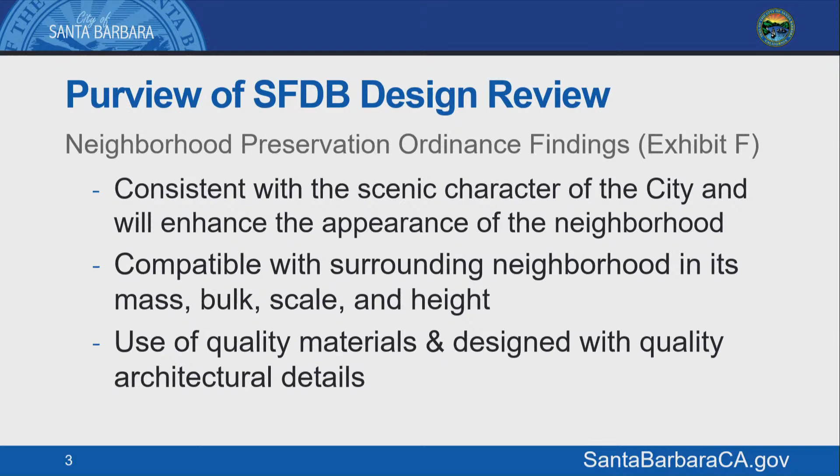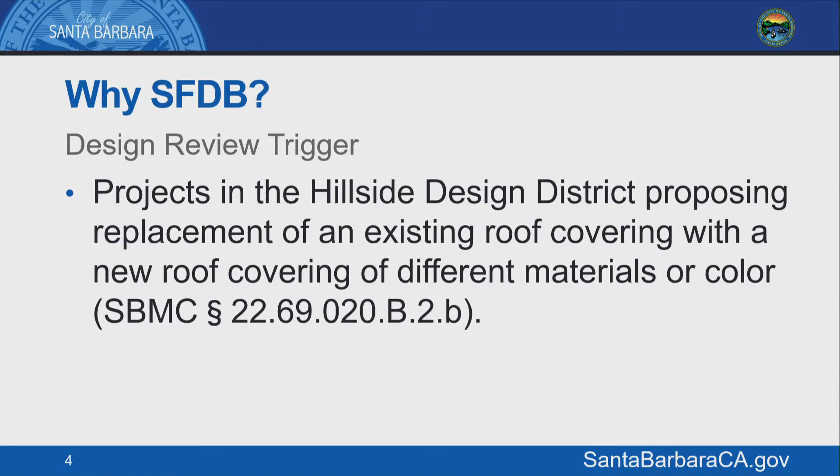The reason this project has to be reviewed by the board is because it's located in the Hillside Design District, and it's proposing replacement of an existing roof covering with a new roof covering of different materials or color. For example, if a wood roof wanted a metal roof in the design district, it would need board review. Overlook Lane is replacing its current shingle roof with something different, proposing to replace the existing burnt sienna red composition shingle roof with new terracotta colored Spanish Brava lightweight tile.

The Brava tile will surround solar panels already approved in building permit BLD 2023-00193, and new composition shingles matching the existing shingles will be installed underneath those solar panels.

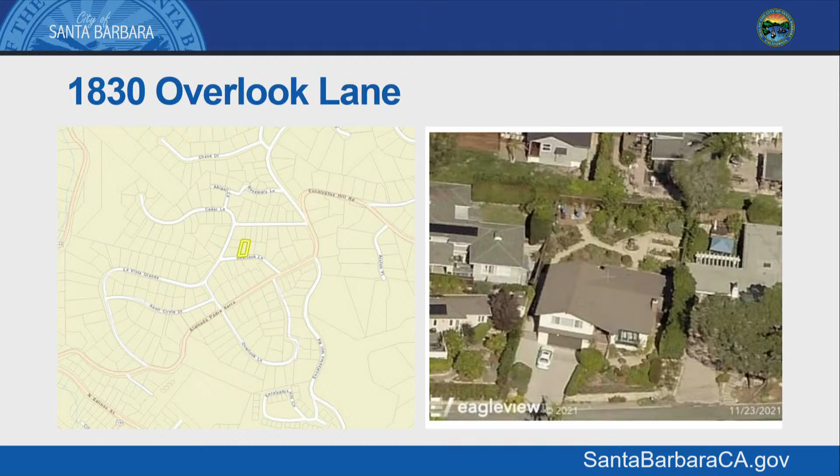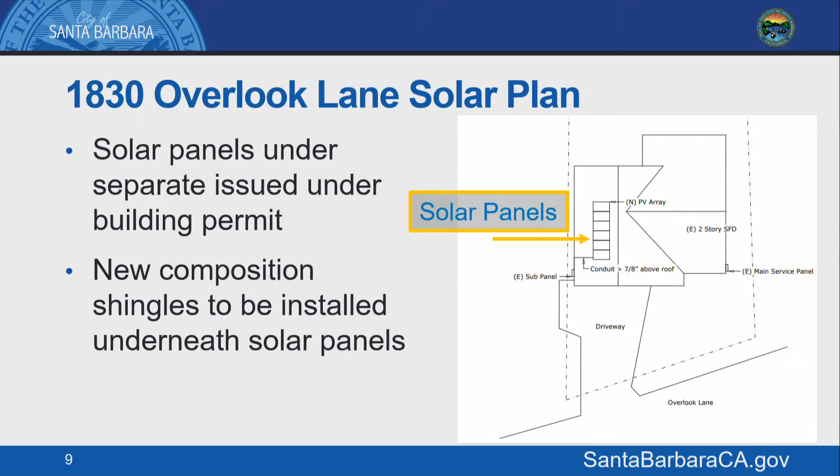You can see the solar panel project already approved under a building permit. Solar panels are not under the purview of the commission nor the design board, but it's helpful to understand that the proposed roof tiles would be built up to the panels and not underneath them — again, those are the Brava tiles.

The re-roof project was reviewed twice by the board. At the initial hearing, the re-roof was denied with the caveat that a like-for-like roof replacement, or a clay or concrete tile roof, would be supported by the board. Facing denial, the applicant requested the project be heard by the full board for further consideration, which the board granted. At the next hearing, the project was ultimately denied in a 3-2 vote.

The SFDB denied the project because they could not make the neighborhood preservation ordinance findings, nor the single-family residence design guidelines for the proposed Brava tile. The tile wasn't natural enough, it couldn't hold cement mortar, and so it couldn't have those double starter eaves, randomly laid field tiles, or mortared bird stops.

Now, I'm aware that is quite a lot of roofing terminology that not everyone in this room might be familiar with, but I'll get to it soon. You can also see Exhibit G in the staff report for a quick reference, if you want to refer to that now.

Now, 2 of the 5 board members found the tiles acceptable. For them, the tile could have enough Spanish roofing details to meet the ordinance and the guidelines, especially because the roof would require a costly structural upgrade to support anything heavier than what's there today, including heavier clay or concrete-based tiles.

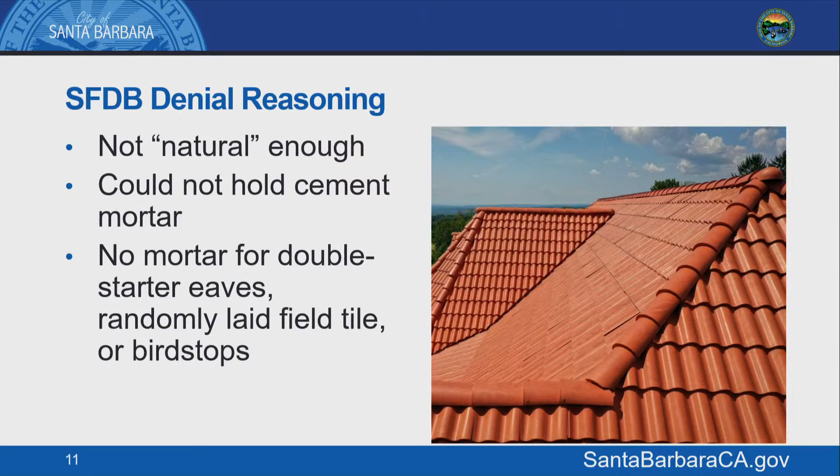But whether in support of or against the Brava tile, the board decides if projects are okay to construct using the Neighborhood Preservation Ordinance and the Single-Family Residence Design Guidelines. The Neighborhood Preservation Ordinance includes 9 findings that the SFDB must make for a project in order to receive approval. But the one we're focusing on today is just quality, architecture, and materials, since that's what the board could not find for the Brava tile.

The tile's plastic-based material just couldn't show its age very well, and it didn't look very natural in appearance. For the ordinance, the material has to look natural enough to fit the appearance of the ridgeline or hillside, and that's exactly what Brava tile could not demonstrate to the board. The tile was just too plastic and could not age like natural materials could.

So while the board has to make findings required by the ordinance, the single-family residence design guidelines help the board decide if a project can meet the ordinance findings in terms of its design.

The single-family residence design guidelines cover everything from house colors to new second floors, and they have a section dedicated to just tile roof design. You can see some of those guidelines here that the board used to help them deny the project.

These criteria apply to both clay and concrete tiled roofs, and really any tile roof for a Spanish home in the Hillside Design District. Now, obviously, they're really specific and narrow criteria, and that's because of how much our city cares about keeping its Spanish look and feel.

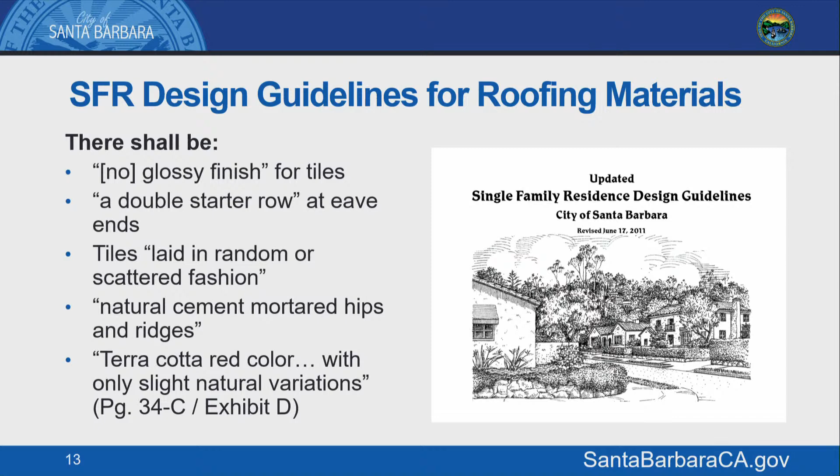So you can see here how different a traditional clay tile is compared to the Brava plastic-based tile, and why the board denied the project. The photo on the left shows a roof downtown that adheres to the criteria in the design guidelines with classic clay C tile. And the photo on the right shows Brava tile from their brochure.

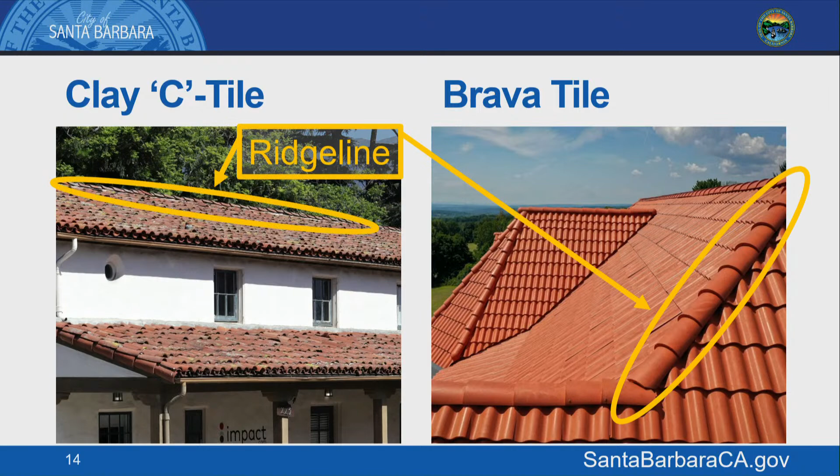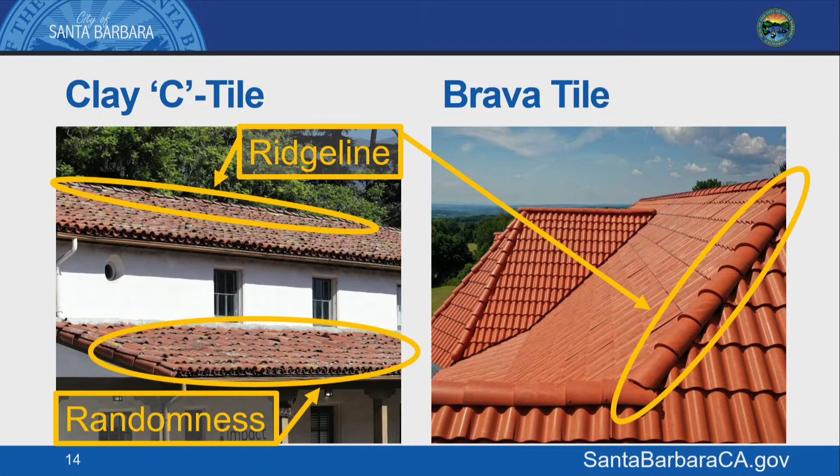And you can kind of see the ridge line there compared to Brava tile. The photo on the left uses mortar, whereas the one on the right does not. You can also see kind of more randomness. The Brava tile on the right is very flat compared to the photo on the left.

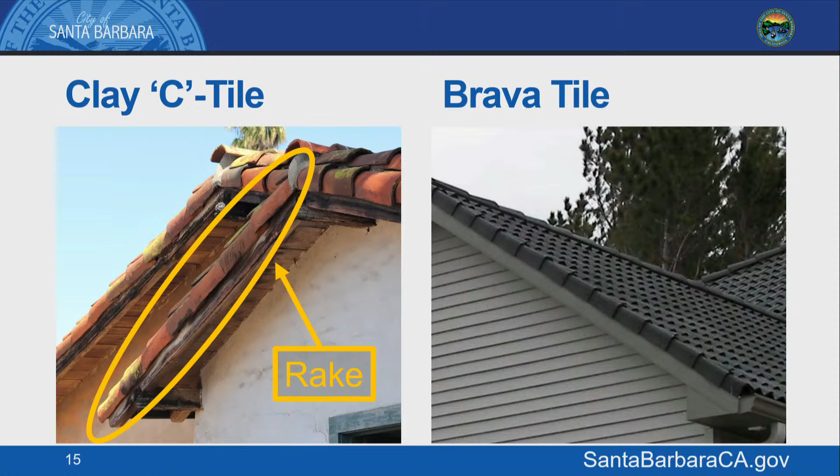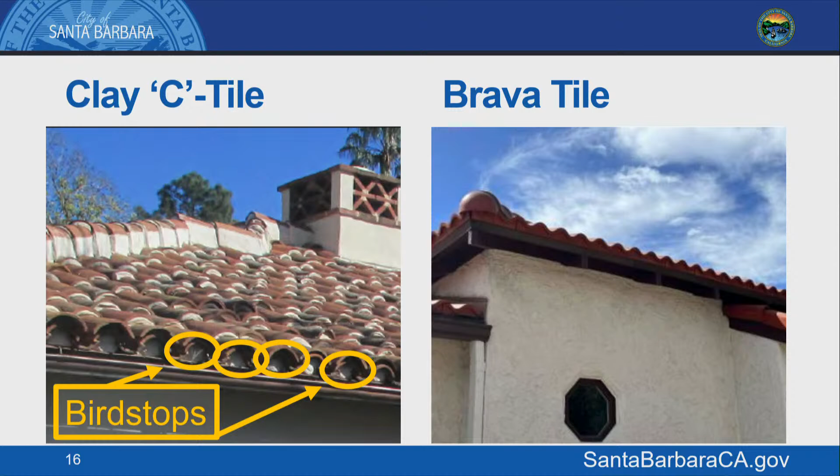And here you can see the difference in what we call bird stops. As the name implies, it stops birds from crawling underneath the tiles. And so again, on the left is a mortared finish, and on the right is how Brava finishes its bird stops.

And finally, you can see here the lack of a double starter row for the Brava tile. The double starter row is kind of hard to see, but this is the first row here on a traditional 2-piece clay tile, and then that's the second row. So you can see the double starter rows at the end of the eaves, and then on the right, Brava tile can only support one, just based on this photograph here.

So to summarize, because of the lack of mortar that allows clay tile to have a natural look and feel in a roof's rake, its ridge lines, its bird stops, and random field tiles, the board couldn't approve of Brava tile.

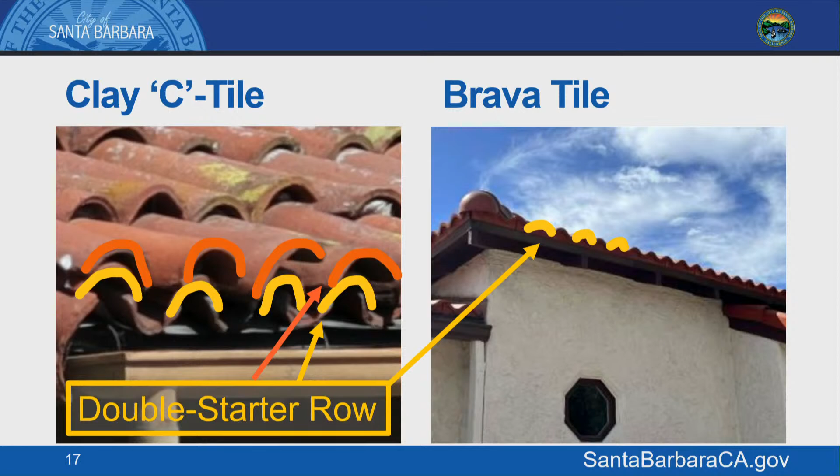The Brava tile wasn't natural enough material for the board, which highly encourages the residence design guidelines for Spanish homes. The appellant believes the board did not have to use the restrictive criteria of those guidelines, as there's technically room for the board to approve any material for a Spanish home.

The appellant also argued that homes in the area use other mission tile types that don't adhere to the residence design guidelines anyway. They further reasoned that though Brava Tile could not hold mortar, it could have enough C-tile ridge lines, rakes, and deepened bird stops to mimic classic Mission C-tile and meet the intent of the guidelines.

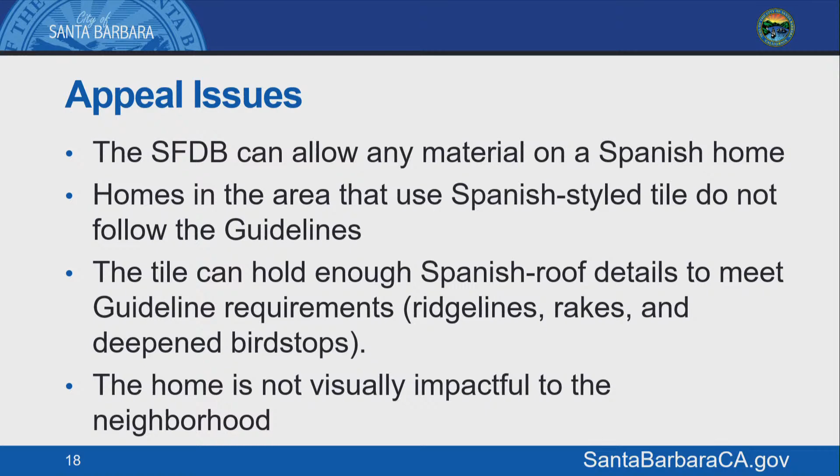Finally, the appellant stated that because the home is located higher up on a slope from the street, the roof would have low visual impact on the neighborhood, as it would be hard to see the entire roof from the street.

Another issue is that the lightweight tile was selected because the current roof structure can only support the weight of roofing that's there today. That means the roof can't hold clay or concrete tiles even if it wanted to - it would have to be restructured or reinforced at great expense to hold more natural-looking tile.

Brava tiles are lighter than shingles, and requiring concrete or clay tiles on the home would be a hardship for the applicant. Wanting to keep the home as Spanish as possible without redoing the structural support system, Brava tile is the preferred solution for the applicant.

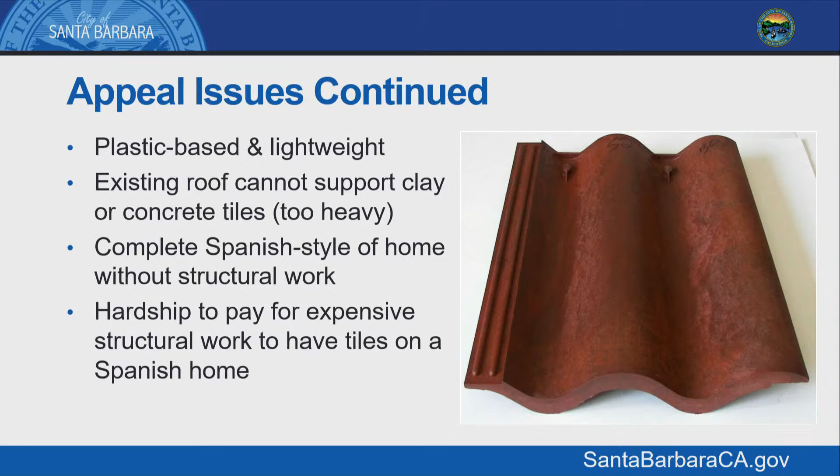I'm going to pause my presentation here to explain a procedural need. The appellant has new evidence they would like you to consider as part of your decision today. Chapter 22.69 of the Municipal Code places limits on new evidence to be heard on appeal, so that an appeal body isn't looking at a completely different submittal from what was submitted at SFDB for review.

This section of the code allows the commission to vote if you determine that relevant information exists that could not have been produced or was improperly excluded at the SFDB hearing. This information was not known or available at the time, and it was actually acknowledged in the SFDB minutes from August 14th.

Since the August 14th meeting, the applicant has produced new evidence about the Brava Tile product and its capability to achieve specific architectural details. Staff is supportive of this new evidence being considered, but we will still need a majority vote of the commission for it to be discussed here. I'll pause there, and you guys can make your decision.

Thank you very much, Mr. Herrick. At this time, the Planning Commission will take a vote as to whether to accept the new evidence before we continue forward with this item. Is anyone interested in making a motion to hear more information?

Yes, Commissioner Wiscombe, thank you. Thank you, Madam Chair. I'm in support of hearing the new evidence, and the reason why is a lot of it relates to why the Single-Family Design Board denied the roofing project, and this new evidence has been produced as a result of the denial. So I would make that motion. I'll second that motion. Thank you.

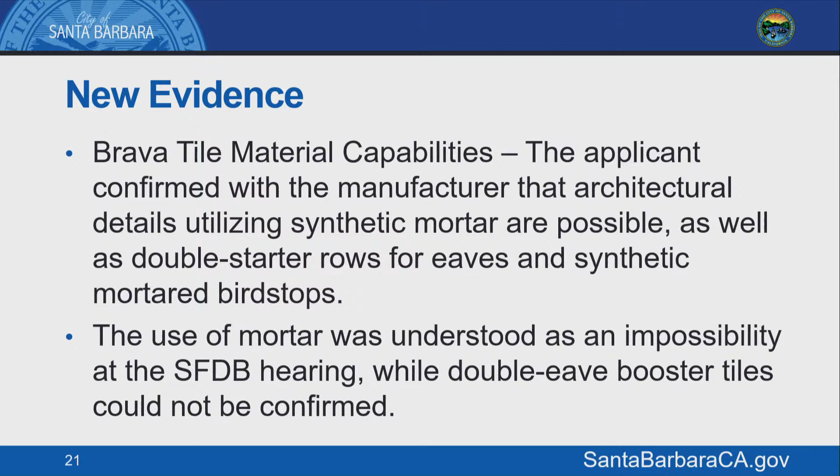Thank you. And before we open the floor up to public comment, I want to ask our city attorney, is there an opportunity to ask a question of staff so that we understand detail about the motion we are going to then make? Chair Bonderson, yes, absolutely.

I just want to ask a clarifying question. The information that we are going to see, that you consider new information, why is it new and why wasn't it provided at the last SFDB hearing?

Yes, thank you, Chair Bonderson. The reason the information wasn't provided at the SFDB full board hearing is that when the applicants came to that hearing, the previous consent hearing only requested that the tile could be permitted for replacement if it was the composition shingle tile or if it was just the clay or the concrete tile.

And so when the applicants arrived at the full board hearing, some of those details with the double starter eaves, the capability of the tile was unknown at that point because the Brava tile had never been asked to do something like that before. And so when there were questions about whether or not the tile could or could not hold mortar, initially it was a no because of the material itself.

It was plastic based, so it couldn't actually stick to the tile itself. And there were questions about whether or not the tile could maintain its double starter eaves with or without mortar, just if that was possible.

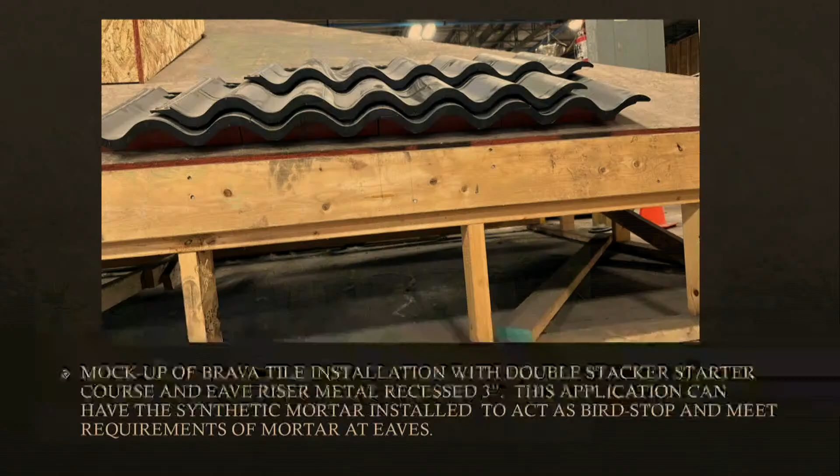When we went back to the Brava Tile manufacturers, to the engineers, they started looking at different ways that we could do the booster tiles and have the eave elevated and not use the eave riser metal that would be sitting along the face of the tile. So this pushes the eave riser metal back 3 inches, and when we double stack the eave tiles, it creates that same double booster edge along the eave, like the Spanish tile. This edge along here, the leading edge, would be filled with a synthetic mortar, so it would create the look of the Spanish tile with the bird stops.

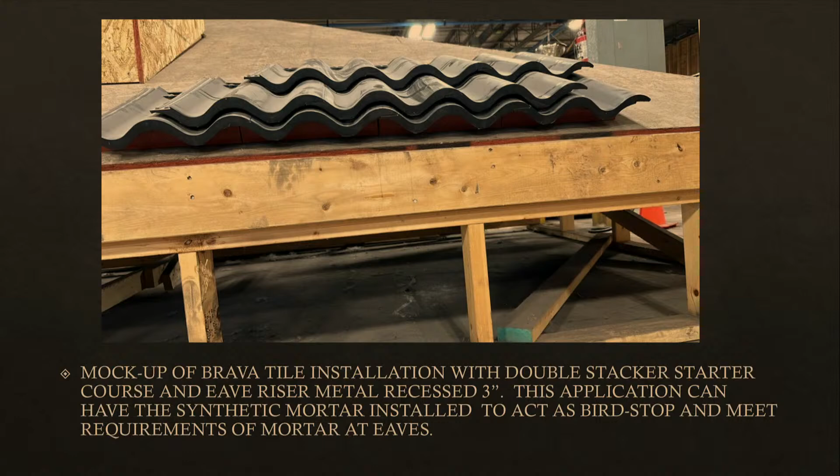After we had the meeting on August 14th, I received an email from Aaron Scholl, who was at the meeting on the 14th, and he came back and said that their engineers had determined that we could actually do the eave bird stop. We could kick up the eave fields, we could use a C rake tile, and we could also mortar pack the hips and ridges along with the rakes, and create this design quality that they were looking for from the design review board.

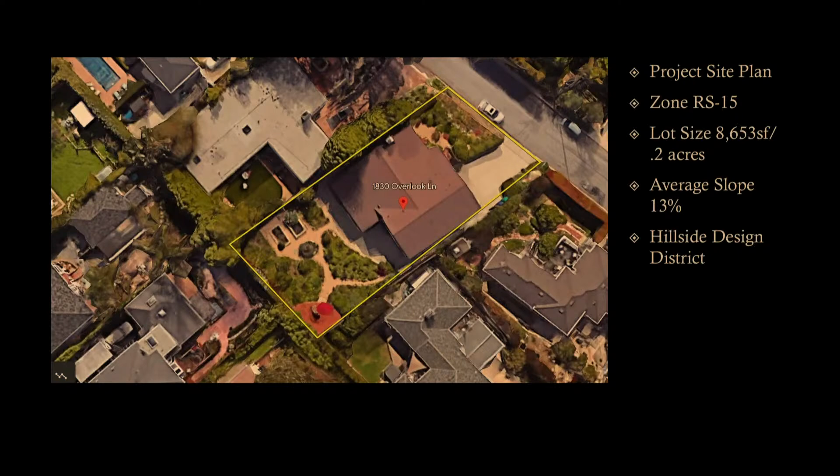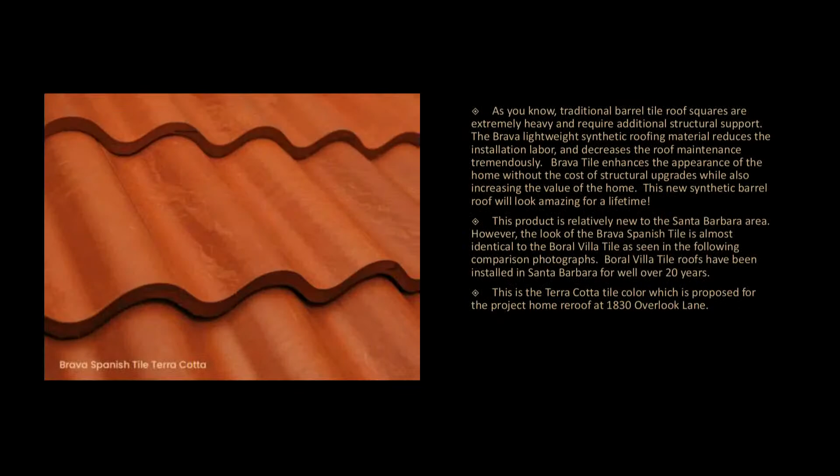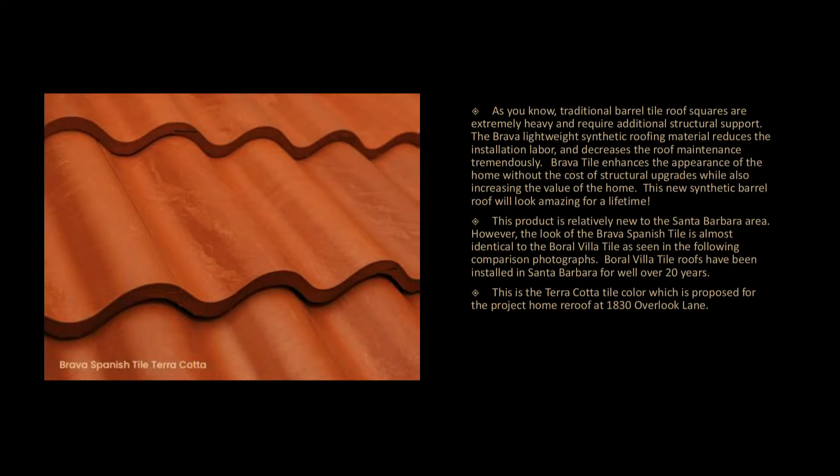This is the color that we've applied for, and it is obviously the Spanish tile. It's not a huge variation in the color, which I know is prohibited, so this also meets the criteria.

If you look at the comparison of the Boral Villa tile, which is in numerous locations in Santa Barbara, this is a concrete tile on the right-hand side, and this is the Brava Spanish lightweight tile on the left. You can see they're almost identical.

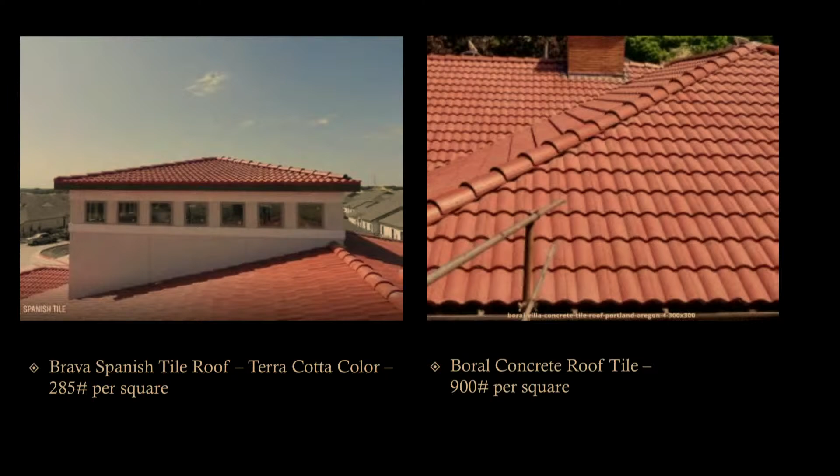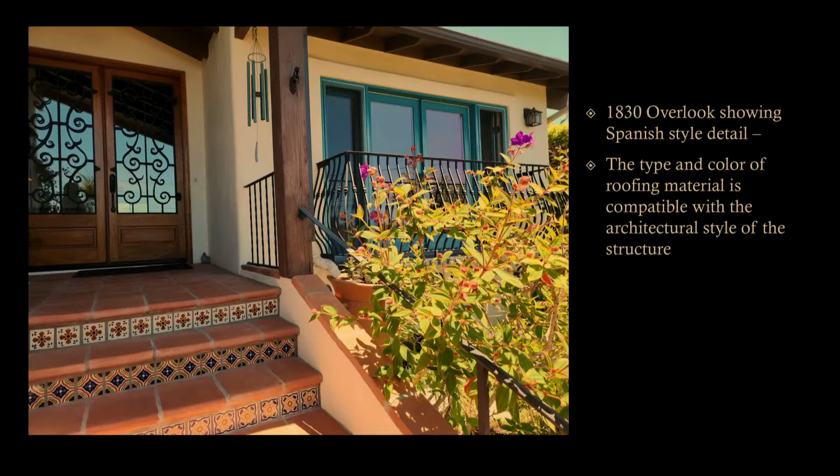This is the project view of the home, which you've already seen; Sebastian has shown that to you. You can see the Juliet balcony, the Spanish tile of the home, even the windows. The tile stairs, obviously, are Spanish in quality. The door, the pavers, even the color of the window frames. The backyard exhibits the same kind of Spanish style, so the Brava tile clearly fits with the architectural style of the home.

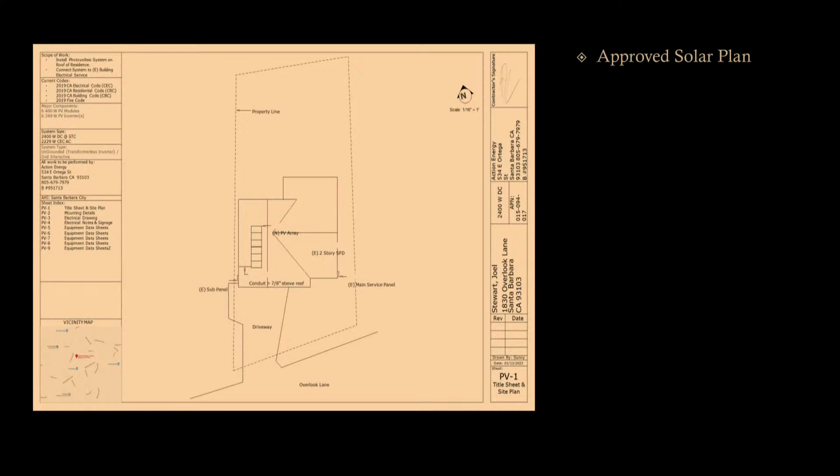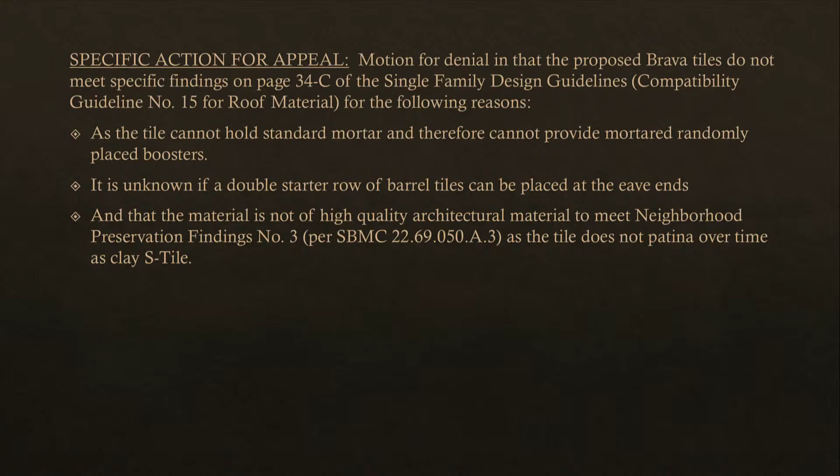These are the three items, as Sebastian pointed out, that the Design Review Board identified as their criteria for denying the permit in the initial meetings. Regarding the mortar, Brava has come back and said that they can do a mortar. It's a synthetic mortar, but it will look like concrete, like a cement mortar. We can install the eave booster tiles, and they are writing a specification specifically for this project because they are very invested in getting this product into California.

We've done several of this type of roofing material, not in the Spanish style, but in the synthetics. We've done many of them in town at this point, other manufacturers, but this is the product that's out there.

The material in question is high quality and durable—you can walk on it. If anyone has clay tile and has had their house tented for termites, you know what kind of damage can be done to clay tile when you walk on it. You have to maintain solar panels, so the nice thing about this product is that it is walkable.

The tile is terracotta and meets the California Title 24 requirements. It is sustainable, made from recycled materials, and is recyclable. It comes with a 50-year material warranty. The material has been installed on some of the finest homes in California and the country for the past 15 years. It's newer to this area, but has a proven track record as a quality product. The material cost is 3 times the expense of the most expensive readily available composition shingle.

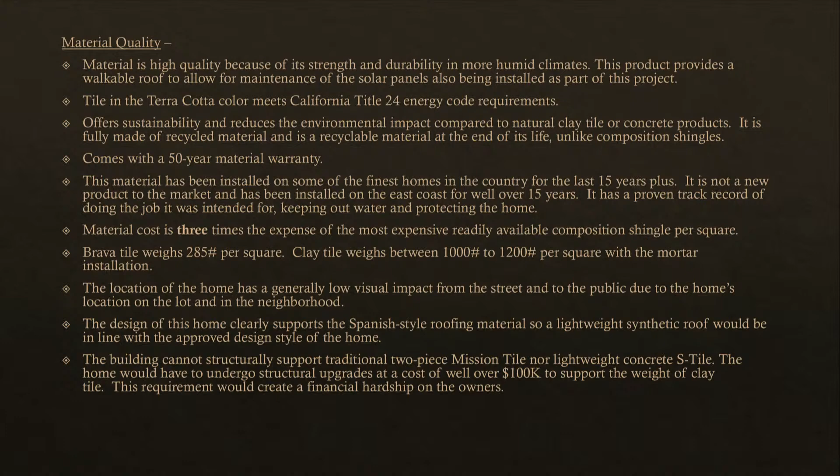The kind of decision you make today increases construction costs in Santa Barbara and adds to the affordability issues here. You can be part of the solution toward keeping housing affordable for people who aren't able to invest an additional $100,000 in structural upgrade construction costs, and this is your chance to do it. Thank you for considering this application. This is the type of decision that will speak to the core and heart of affordability in Santa Barbara. The Brava Spanish tile material represents an era of using an affordable, recycled, sustainable material that respects the criteria and values of the past in the design, but also looks forward to the future.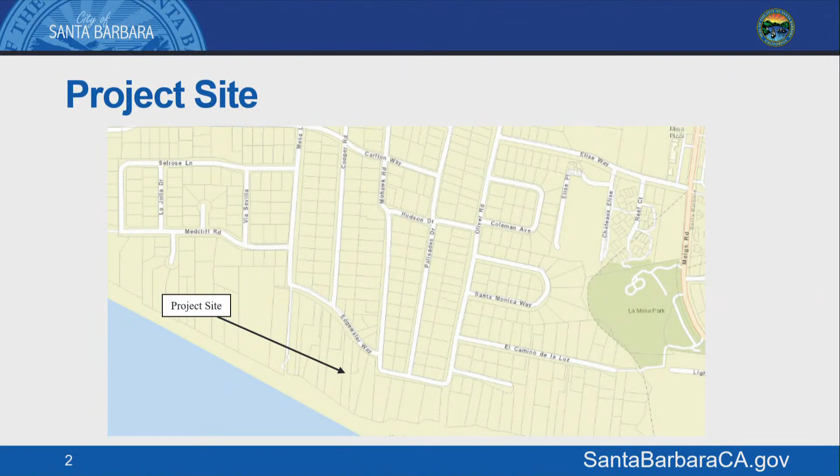The proposed project consists of the demolition of the existing two-story single-family residence and the construction, and a request for a coastal development permit for the construction of a 3,300 square foot two-story residence with an attached 700 square foot garage with a basement below grade and a 600 square foot accessory dwelling unit.

It's important to note that this project was already approved on October 6, 2023. That project was appealed to the City Council by two neighbors adjacent to the west, basically stating that they didn't feel that the project was developed with a big enough setback. They didn't feel that the 41.5 foot bluff top setback was sufficient for this bluff top lot. Staff supported that setback based on the geology report that was provided by the applicant.

So on the date right before the appeals, the appellant submitted a significant amount of information, and at the request of the applicant, the City Council hearing for the appeals was postponed. The applicants provided an addendum to the geology report, which previously stated that the original geology report stated there was no slope stability setback for this property. But when they did an addendum, they provided a more conservative analysis and stated that there was a slope stability setback of 39.8 feet.

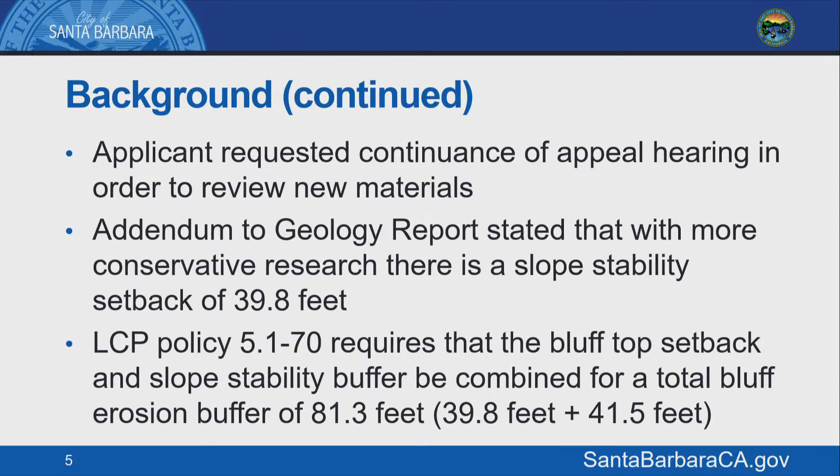So the city's local coastal plan requires that the bluff top setback and the slope stability buffer be combined, which revises the setback from the top of the bluff to a total of 81.3 feet. The applicant has now revised the project by increasing the setback to 81.3 feet from the top of the bluff by relocating the building footprint closer to the street and reducing areas in various sections of the house within the floor plan.

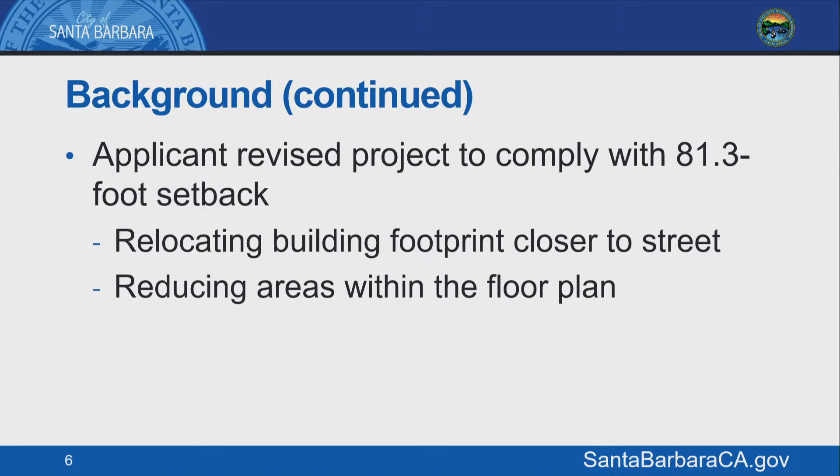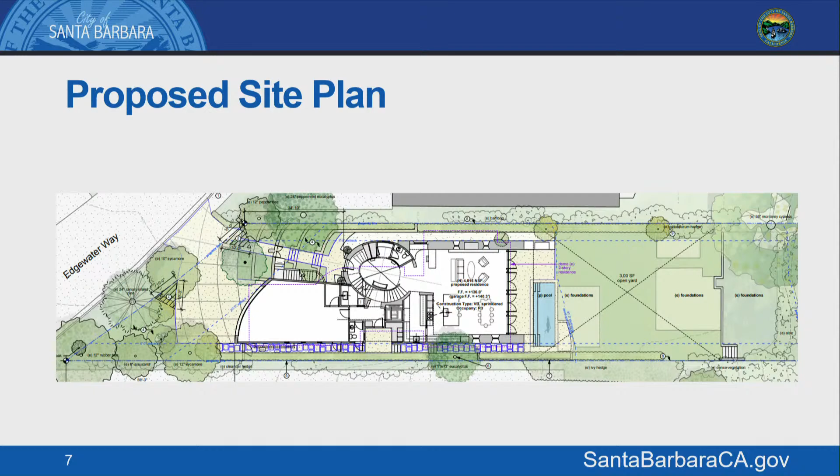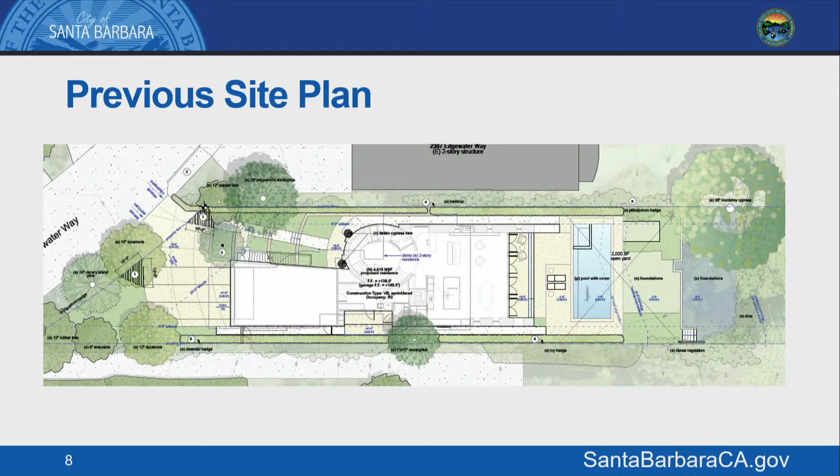Here's a slide of the proposed site plan. On the right, you can see that the pool has been reduced in size, and near the garage and mudroom there are little tucks that minimize the size of the residence to keep it out of the bluff setback and front setback. Here's the previous site plan, showing the previous project about 40 feet closer to the bluff than it is now proposed.

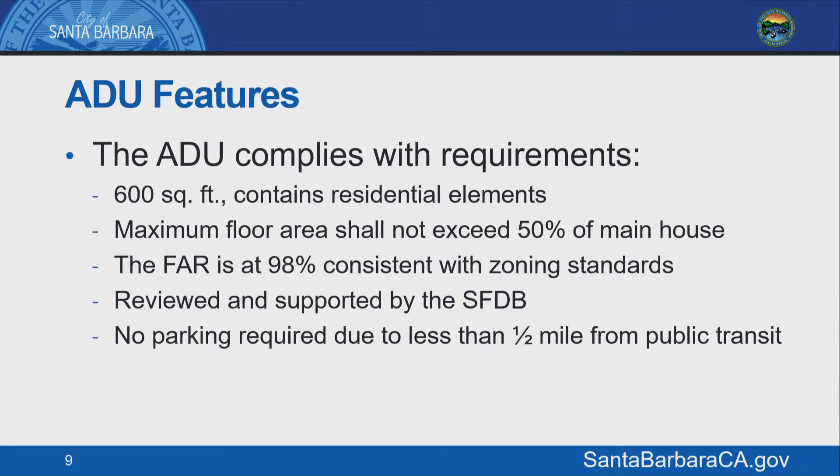The project also has an accessory dwelling unit, and it complies with the requirements. It's a 600 square foot residential ADU above the garage with all required residential elements. It does not exceed 50% of the main house; the floor area is at 98%, consistent with zoning standards. The whole project was reviewed and supported by the SFDB prior to the last Planning Commission, and no parking is required due to the project site's proximity to public transit.

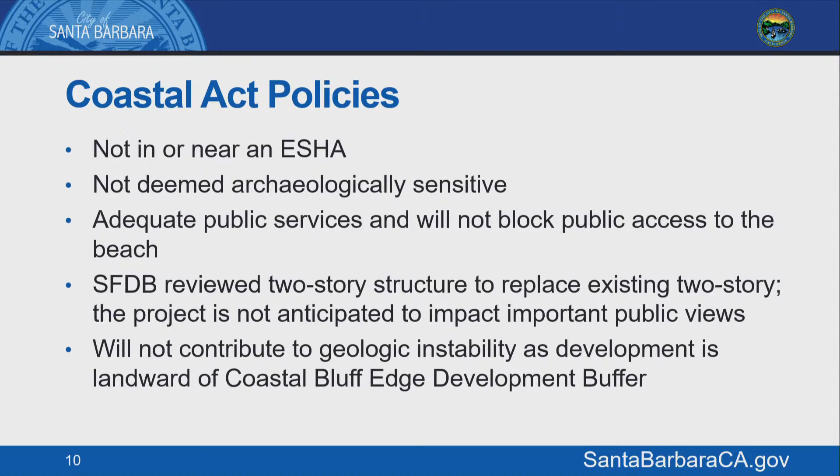The project was also reviewed for compatibility with Coastal Act policies. It's not in an environmentally sensitive habitat area, and the project site was not deemed archaeologically sensitive. Adequate public services are provided, and the project will not block public access to the beach. The Single Family Design Board reviewed the project, and it would not contribute to geologic instability, as the development is landward of the proposed coastal bluff edge development buffer.

As far as consistency with the coastal land use plan, the project will meet Tier 3 of the stormwater management program. A stormwater management report was prepared by Ashley Vance, and to satisfy those requirements, the project includes underground retention chambers accompanied by an irrigation pump that will treat stormwater generated by a 1-inch storm. New storm drains will direct runoff from the proposed building roof areas and impermeable surfaces to these underground chamber facilities located under the driveway.

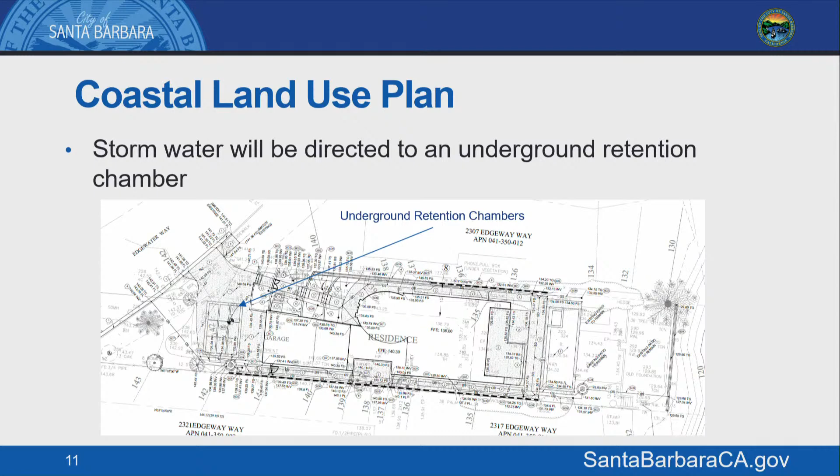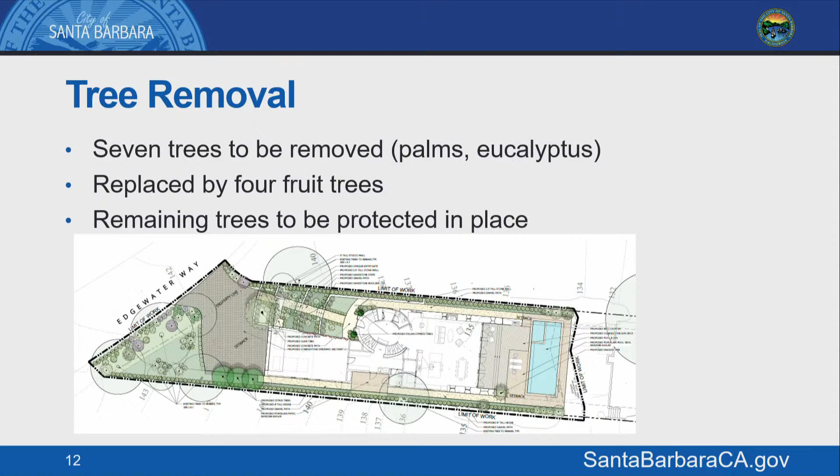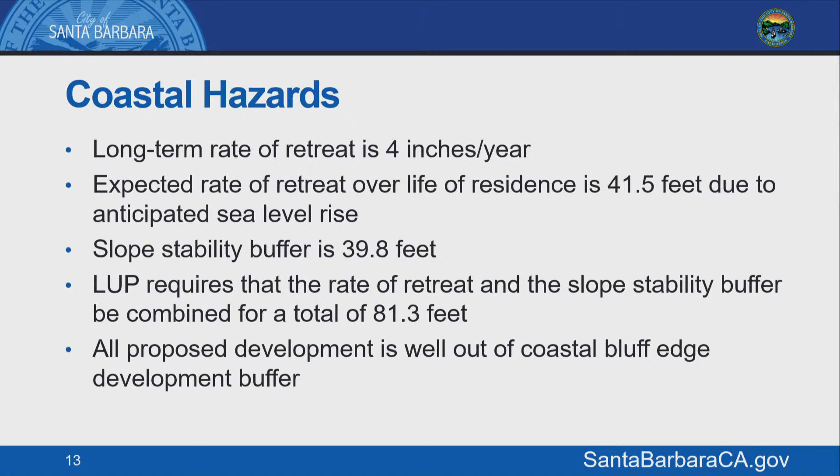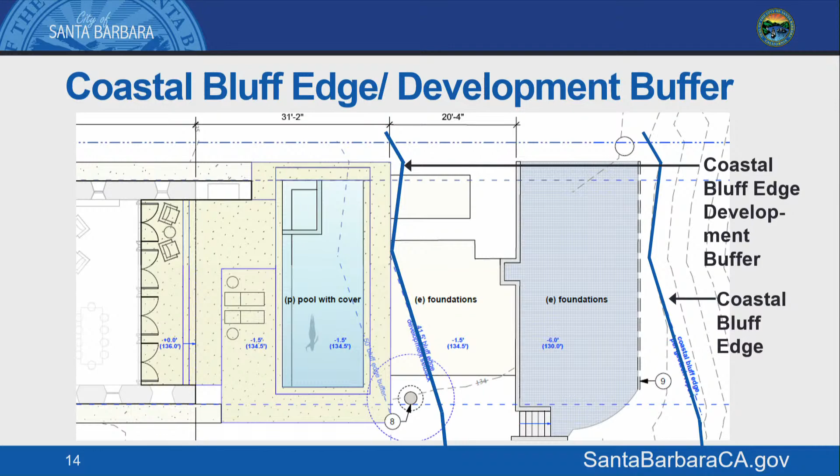Here is the previous project, showing a setback of 41.5 feet from the coastal bluff edge. And here is the revised setback — as you can see, they pulled it significantly further back, 81.3 feet from the bluff edge development setback.

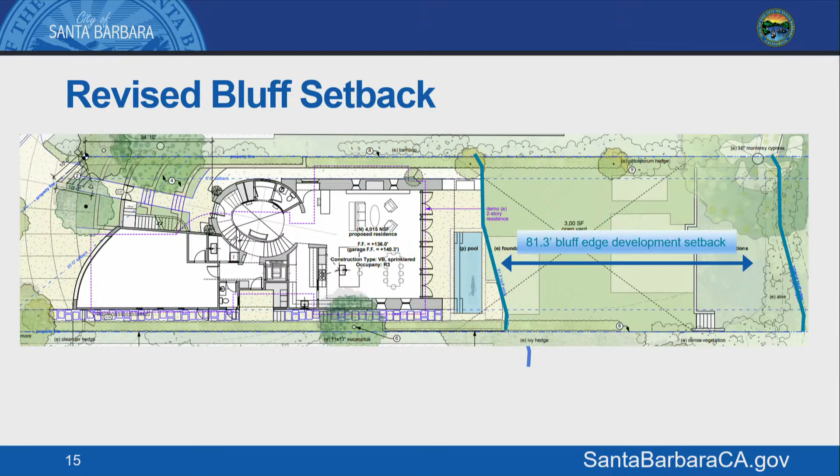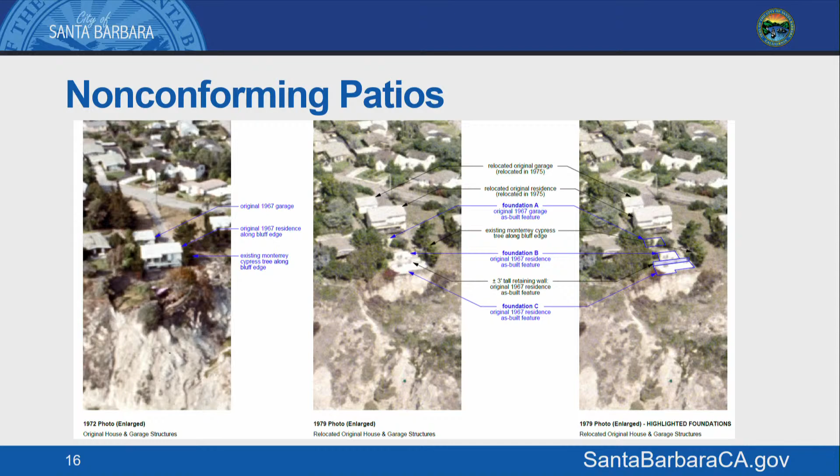There are several older foundations on the site, I believe from the early 70s or before, which Commissioner DeLuccio saw on his first site visit with me. Because they were there prior to the Coastal Act, they are allowed to remain, but they will not be able to be fixed or enhanced to maintain their lifetime. There's a condition of approval that reflects that.

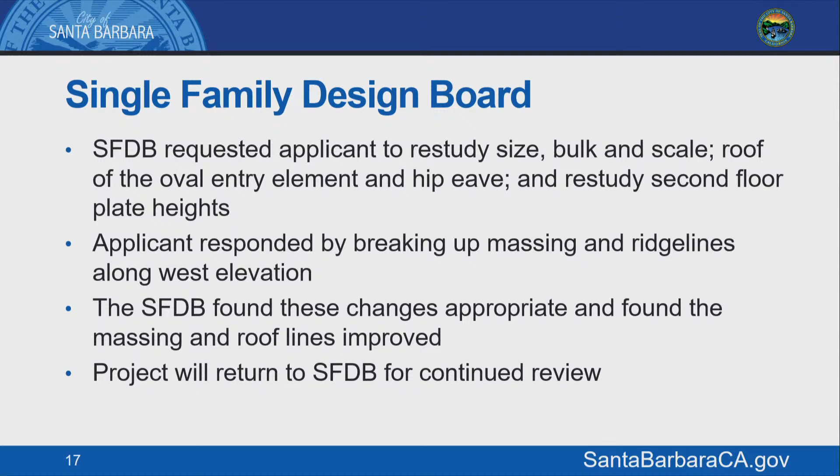The project went to the Single Family Design Board, and the board requested that the applicant restudy the size, bulk, and scale, and the roof of the oval entry near the front of the house. The applicant responded by breaking up the massing and ridge lines along the west elevation, and the board found these changes appropriate. Here are some slides.

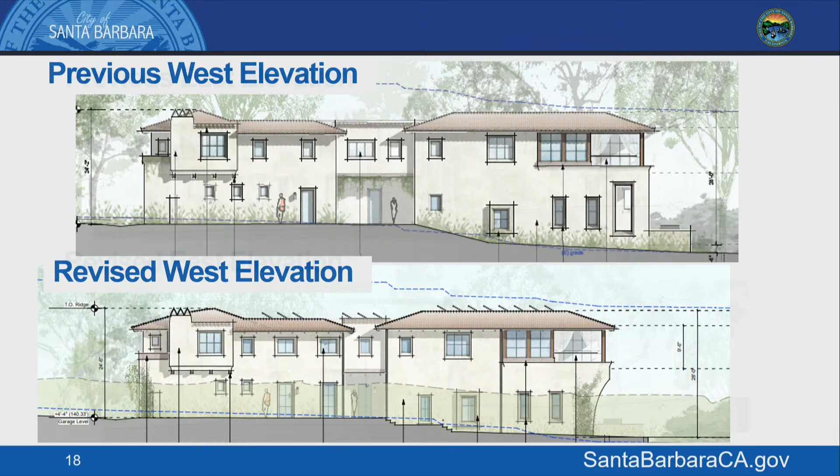This is the east elevation, and again you can see that some of the glazing has been revised. The applicant has made minor changes to reduce the size of the project to keep it out of the setback, visible on the right-hand side of the slide. The applicant will be able to give you more description of the changes they made.

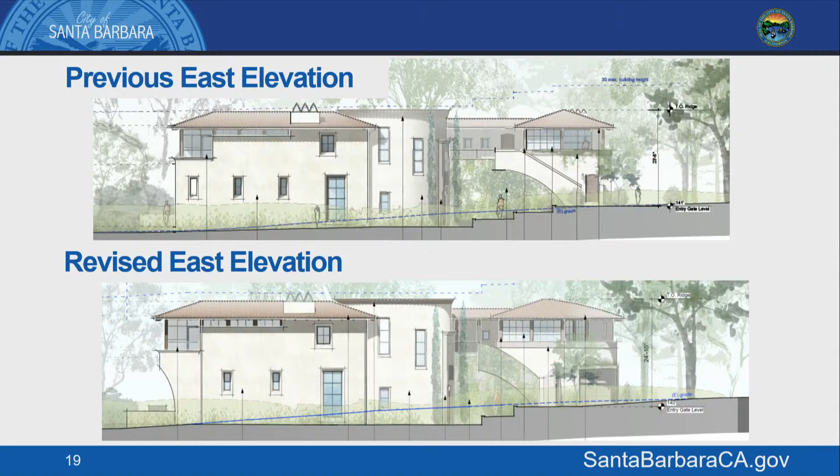These are the north and south elevations for the proposed project. North faces the street, and you can see the garage at the bottom. South faces the bluff.

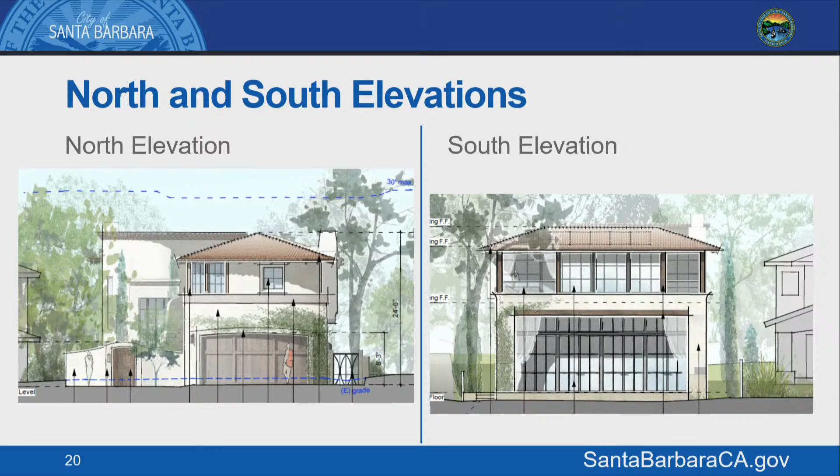The project can be found categorically exempt from CEQA based on Section 15303, which allows for construction of residential buildings and accessory structures. That concludes staff's presentation.

Staff recommends that the Planning Commission approve the revised project with the increased 81.3-foot bluff setback, make the findings in the staff report, and subject to the conditions of approval in Exhibit A.

We do have the architect Shaheen Gavazinde from Blackbird Architects and Ken Radtke, and we have the landscape architect Courtney Jane Miller, and the property owners Mr. and Mrs. Pohl are here for the project.

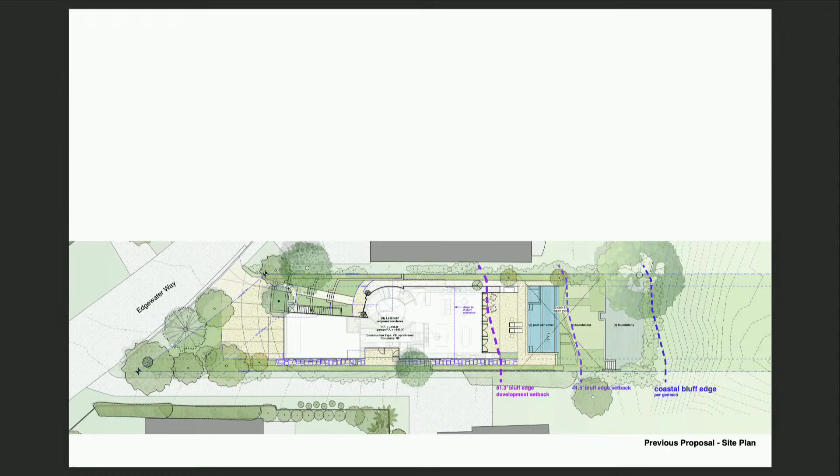So you can see this 81-foot setback touched the edge of the previously proposed building, and most of the pool and patio was in a newly reckoned bluff top setback.

When we look at the next slide, you'll see the difference between the two projects is that the house has been moved inboard almost 14 feet by taking advantage of the diagonal sort of setback line out at the street. We have adjusted a little bit the shape of the garage and what's happening in the mudroom, and then everything forward of that, as far as the house and residence goes, stays the same.

The pool, as you can see, is much smaller. It's a multi-generational family, and the pool is certainly a part of their health and wellness regime. That's also why the ADU is a big part of the project as well.

So now behind the 81-foot setback is the patio and very small pool. We can go further into that, and you can see that the garage, which is a two-car garage with a little bit of extra space in it, just changed the orientation of the front, and that allows the house in whole to slide further to the street and to avoid the request for any kind of modification, variance, or other special exception.

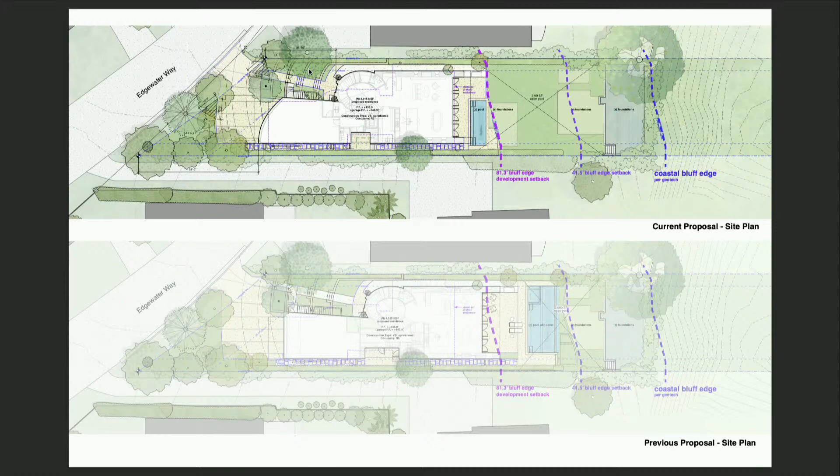You'll all be familiar, 4 of you were here last year, with the project, the site on Edgewater. This is the view from the street.

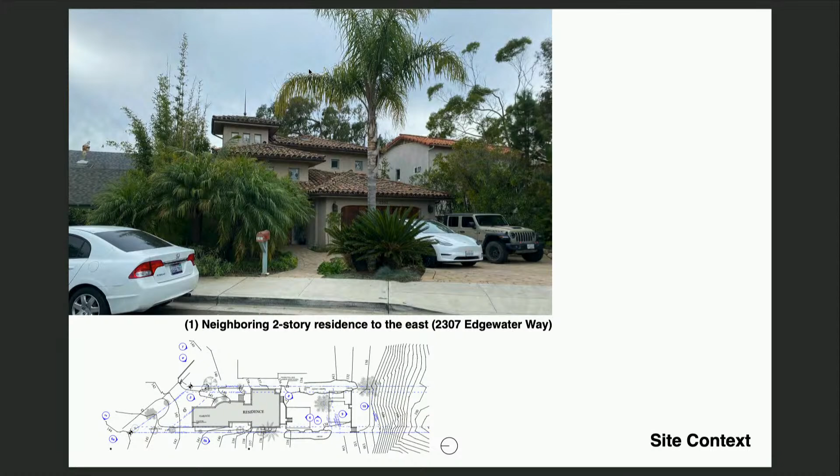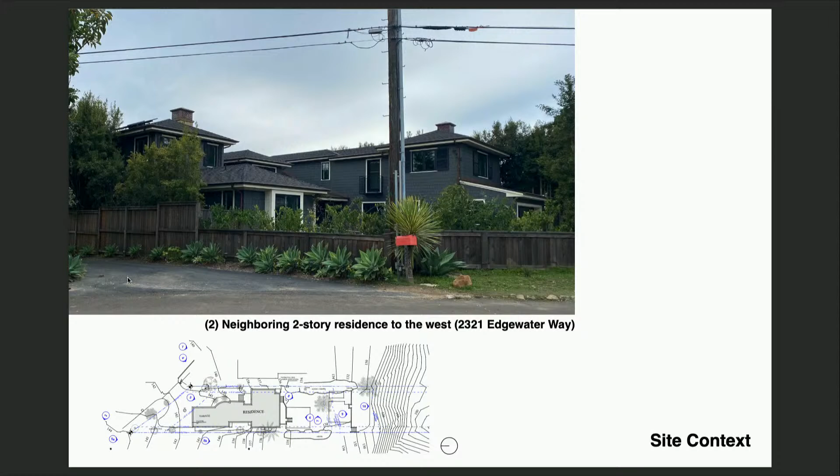Various neighboring houses next. This is the house directly to the east, and the first house directly to the west that's along the street. And here you can see a long driveway that goes between the Pohl property and this neighbor, and this driveway goes all the way down to the property on the bluff, the neighboring property.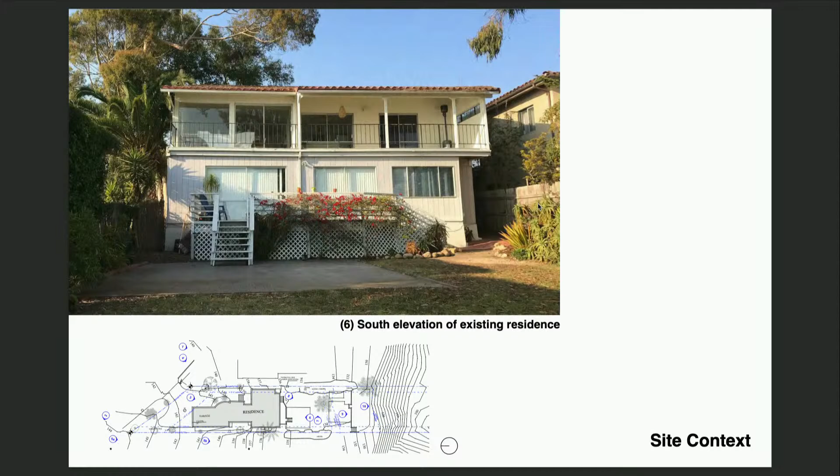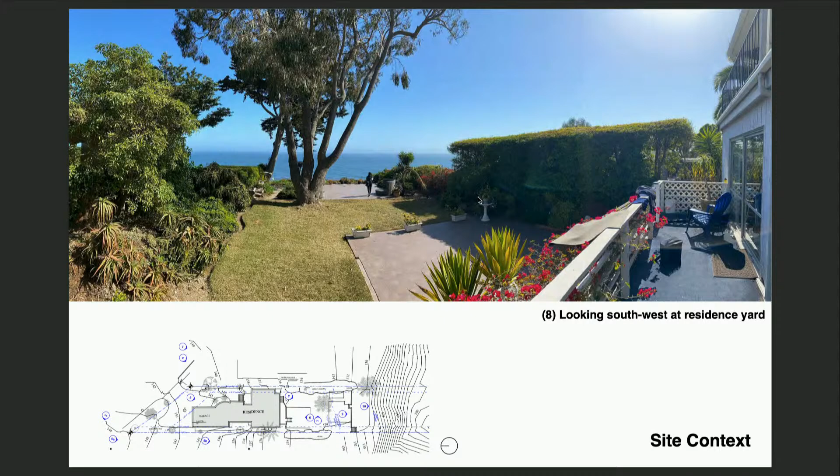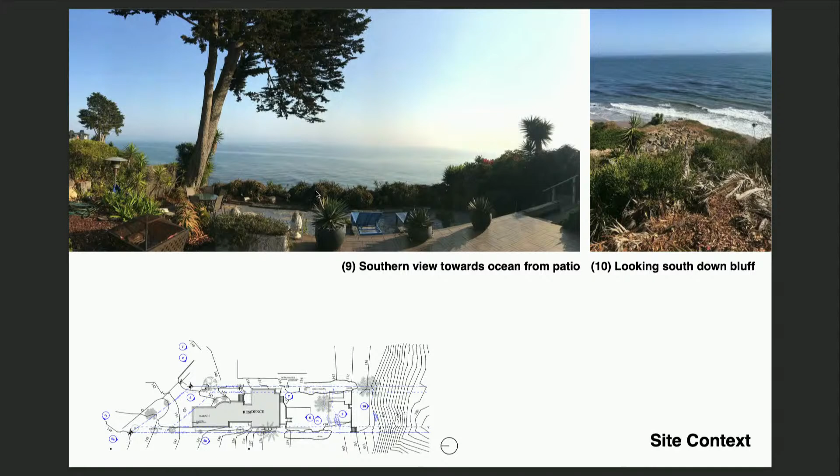Some views along through that bluff side yard. Everything outboard of that bluff top setback is essentially to remain, other than one proposed tree removal, which is this eucalyptus. There's an arborist report, et cetera, same as previously proposed. Here's the gorgeous view out and a wonderful cypress.

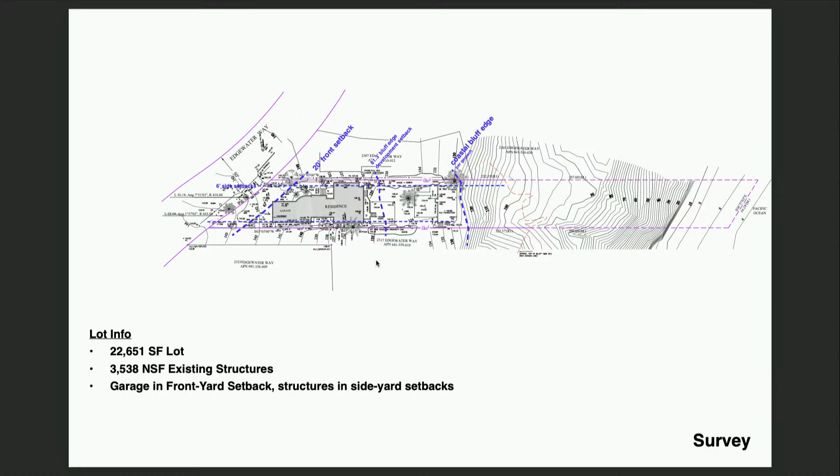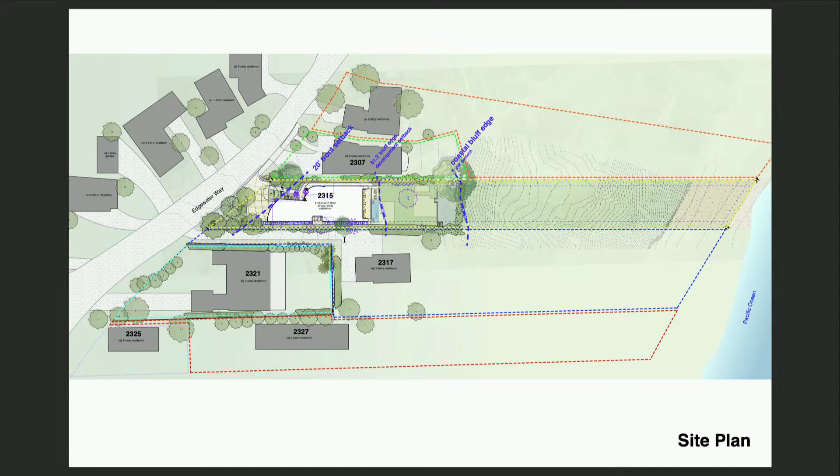This is technically the survey, and again you can see these two setbacks in relation to the existing residence. Here you can see again those two setbacks, with the property lines and the adjacent property numbers. You can see this long flag driveway that goes down to the neighbor to the west, and the situation between the various structures.

The existing house is proposed to just be replaced. This is the proposed site plan, the setback coming through here. This yard is to be reapportioned, and then the reformed garage that faces the street actually a little more directly.

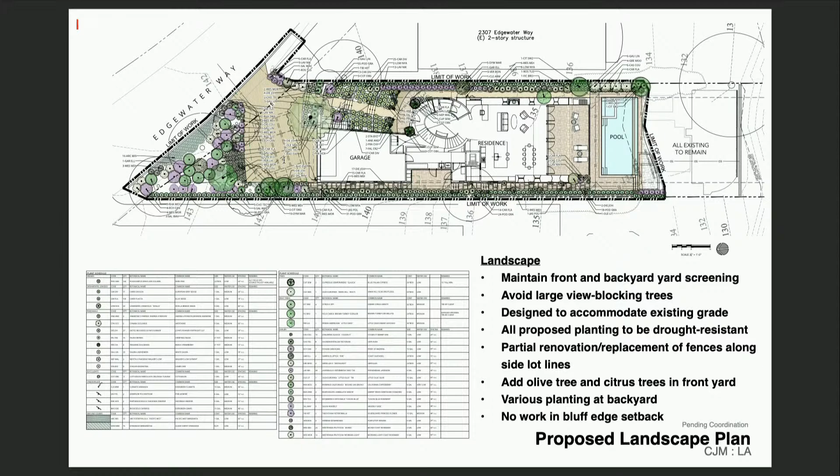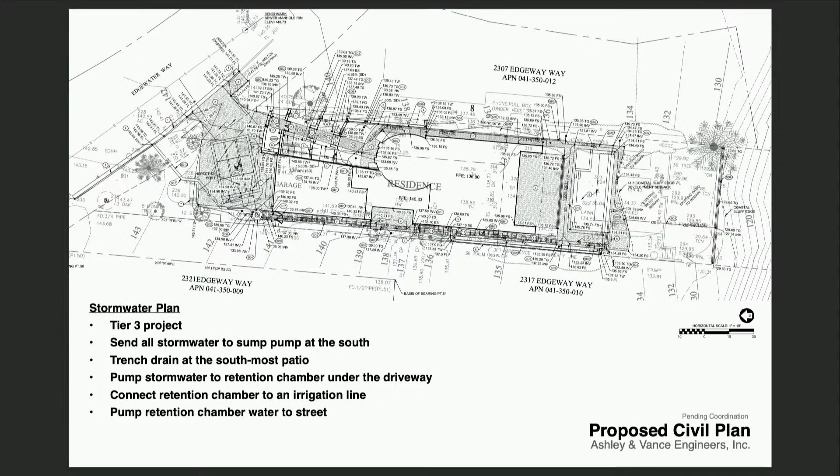The previously approved landscape plan at the SFDB used a palette of mostly native plantings, low water use, avoiding bringing water out onto the bluff side. Previously approved, extensive site drainage plan with technical measures to keep water from heading towards the bluff, that we could go into at length if you'd like more information.

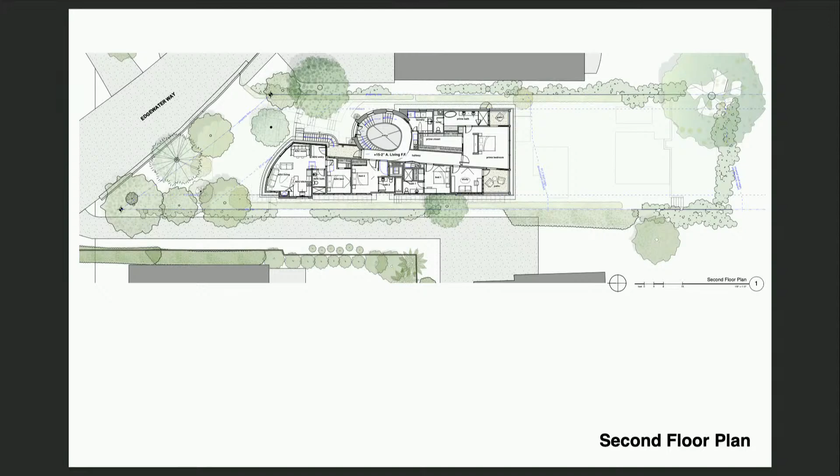The ground floor plan, everything from here forward is the same as before. The garage has been reformed and the mudroom has been sort of push me, pull you, to make it smaller. Upstairs, the ADU has also been reconfigured in order to allow for just sliding the project a little bit forward. You can see this is a reinterpretation of the same roof plan that uses very traditional tile, I might mention, with interstitial inboard spaces for photovoltaics and mechanical equipment so that those don't show to the outside.

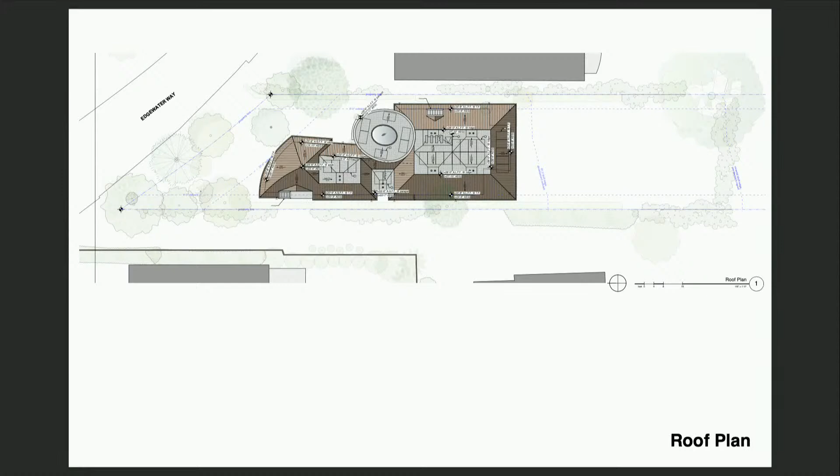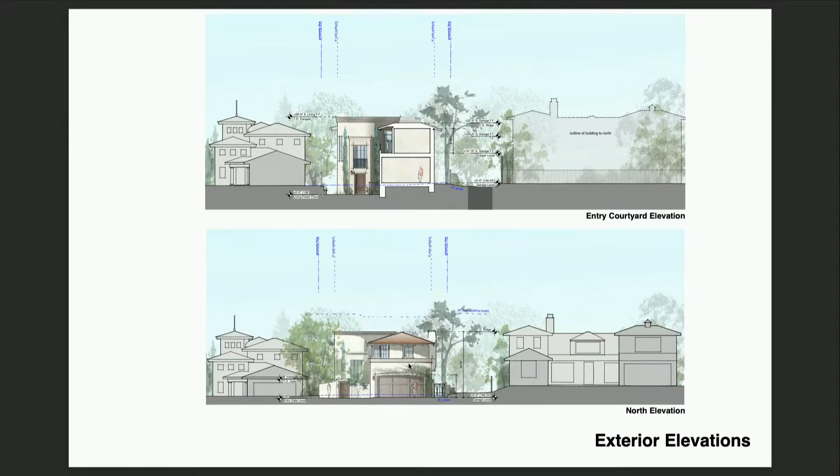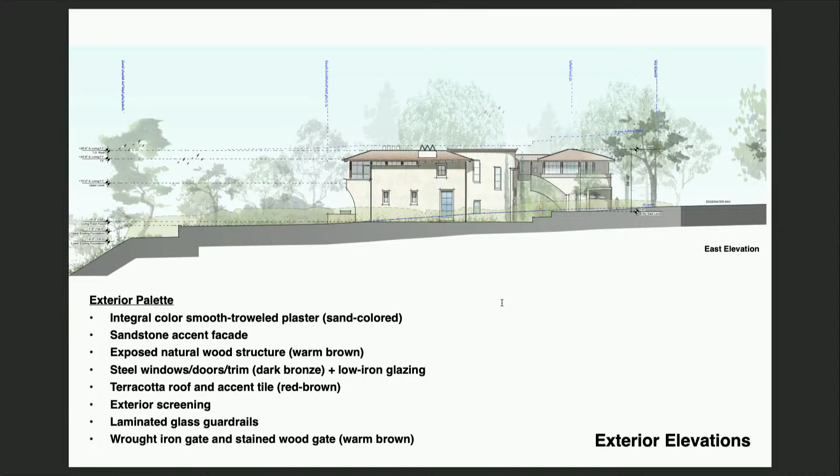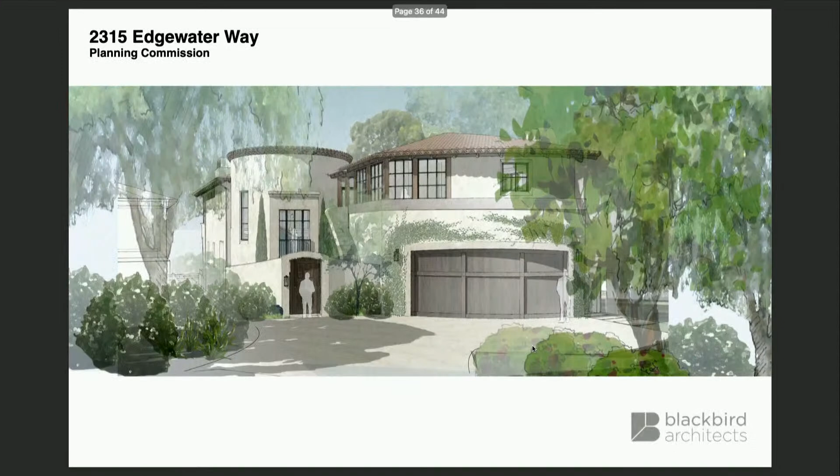This palette of sandstone, integral color plaster, terracotta tile, sandstone accents, and just a very gentle Mediterranean palette. Same elevations that staff showed. You might go back to the site plan.

That's all I would say right now. We're really hopeful, the owners are really hoping to get in motion.